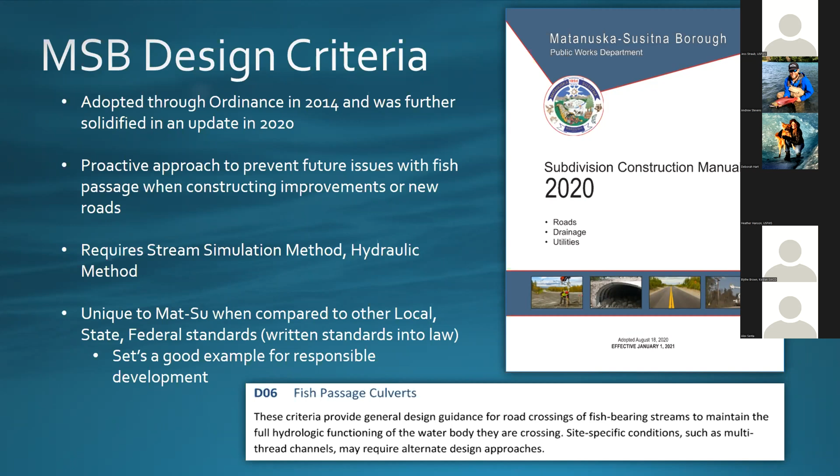Okay, so general problems you see with inadequate fish passage structures. If they're undersized, it creates high velocity. This can cause perched culverts with outlet drops and scour in the downstream section, making it hard for fish, especially juveniles, to move around.

Eventually, or even if they're not undersized, if you just neglect these culverts, they end up failing, corroded, collapsed, and even plugged with sediment, sod, sticks, brush, sometimes beavers. Anytime you have a small culvert, it's easier to plug, and they're harder to maintain. You can't clean out the insides very easily.

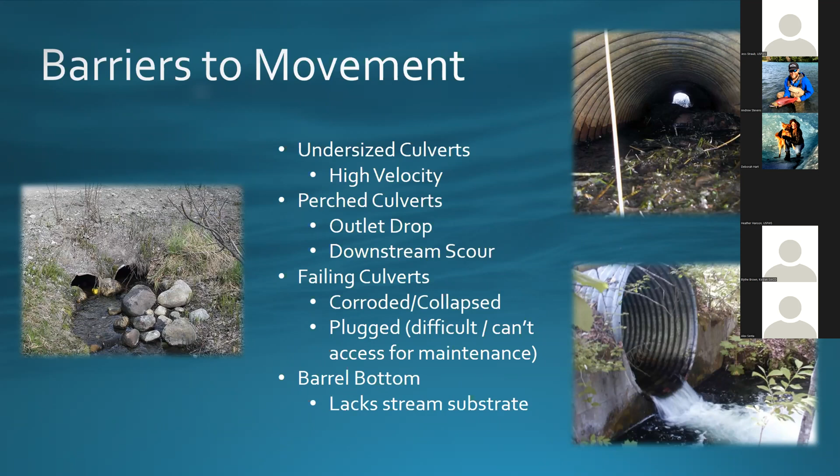I used to have better photos for these two points, but we lost a lot of stuff in a cyber attack a couple years ago. On Cottonwood Creek, I used to have an undersized set of culverts. It's a warm groundwater-fed system, I believe, and it flows all winter long under the ice. If the culvert gets iced up, it basically backs up and comes over the road, creating a big glacier over the road.

In this particular section, it was a curve on the road, so really just a hazardous condition that we would periodically send our crews out to. We have mobile boilers on the back of a dump truck, a big steam boiler, and we would go steam thaw, or bring the excavator out to try and rip through this ice to get water flowing back to the culverts. I've literally seen people tied off to the bank or trees, walking over this big shelf ice with glaciering water everywhere. It's just not a good situation.

So anyway, inadequate fish passage structures cause flooding. They can get frozen up easier. Anytime you're out doing civil work, especially by surprise, it ends up being very costly, and it's not sustainable for the budgets we run.

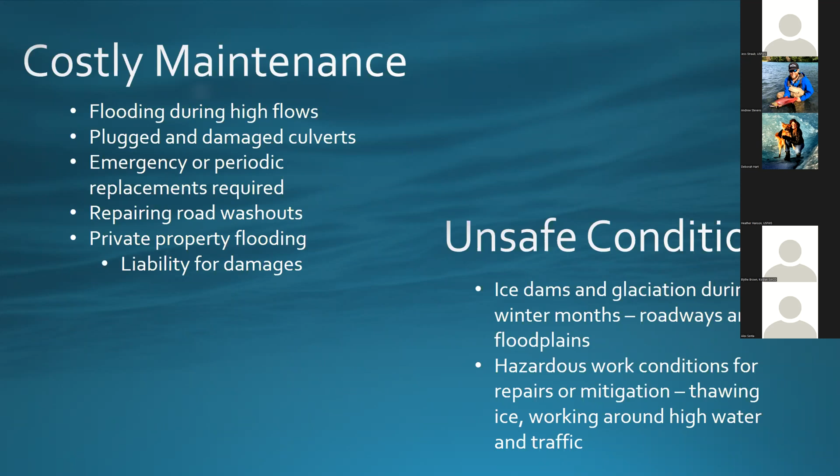Okay, I have a couple projects to highlight here. This particular one is on Cottonwood Creek. It's not the site I mentioned before about the glaciation, but it's just upstream, the next crossing upstream, on one of the residential streets here, Marble Way.

In this particular site, you had a fairly deep entrenched channel through this residential area. Cottonwood Creek is pretty wide. We have one culvert that's about 18 feet wide, and this overflow culvert in the foreground is about 12 feet wide. In the background, you see some white plastic running along the bank—that's your stream diversion.

On this particular project, we actually underestimated what it was going to take to construct that, and we had to cut a change order to do extra work to deal with this diversion. Like I said before, and I'll say it again and some more later, the most important thing on any of these projects is dealing with this diversion water and your groundwater.

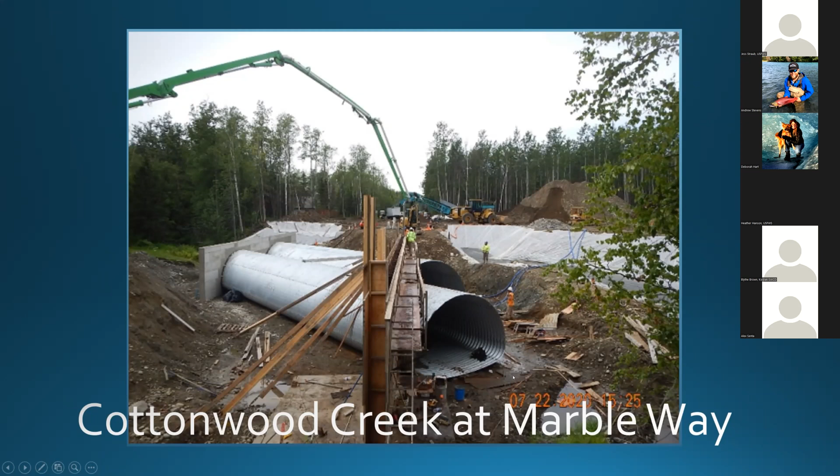This is that same head wall, probably a few days later or a week or two later. This is the downstream side, but similar look. You'll see some more later of the upstream side, but yeah, the finished product of the pipe structure itself, and they're beginning the road work and the bank reconstruction there.

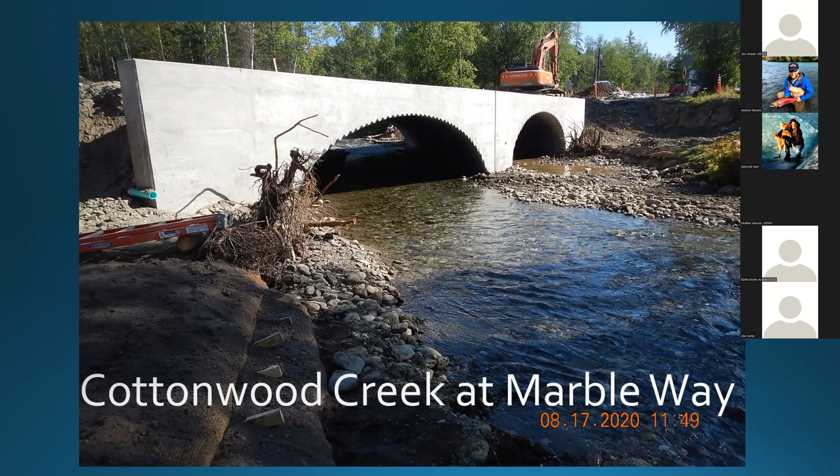This is the same view of the upstream side, basically, that you were looking at before. After it's been placed, the creek is back in the final channel alignment there. The diversion's been backfilled. You can see the soils and everything placed back where the diversion used to be, and the channel back in the culvert.

They're working on some of the foreground here, this is fresh topsoil and some root wads that have been placed next to the retaining wall. And some of the bank work here anyway, that's just starting.

One thing I'll mention in this project, you'll see it in the background where all that equipment is sitting, and a little bit to the right of it all, there's a big cleared area. That's all private land. This site required a lot of excavation, and when you do that, you really have to find a place to put all that material. You're digging out a couple thousand yards of gravel, and you can't really afford to truck it away.

So you need to find somewhere on site to store it. This contractor actually just knocked on someone's door and made a trade agreement to use their property temporarily in exchange for leaving them with a flat pad or whatever they do. We kind of stay out of those deals, but this contractor made that deal with the owner and it worked out. They had a screen set up here to produce some of the road material, stockpiling the waste material, the excess material, and then a nice storage yard for their equipment, culverts, concrete trucks, and things like that.

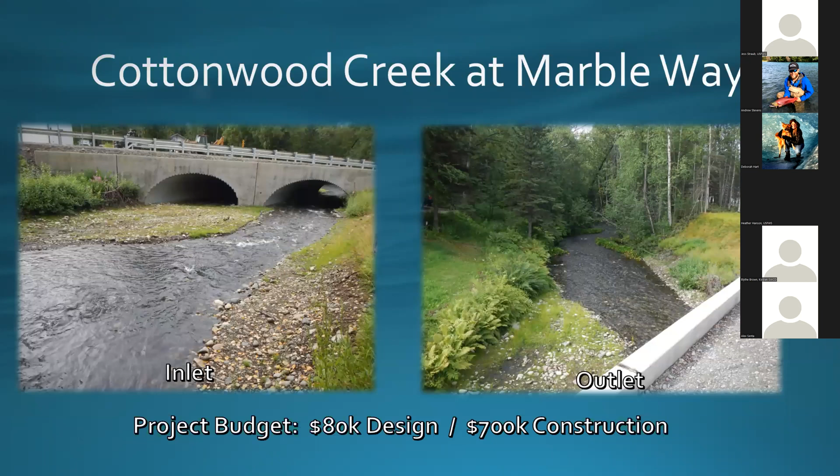Cloudy Lake is up in the Meadow Lakes area. Feeds into Meadow Creek, so the Big Lake system. Phillips Drive is just a neighborhood road down through here. I don't know if this is a man-made lake from back when or what, but this road is basically the lake - this road just kind of holds the lake back.

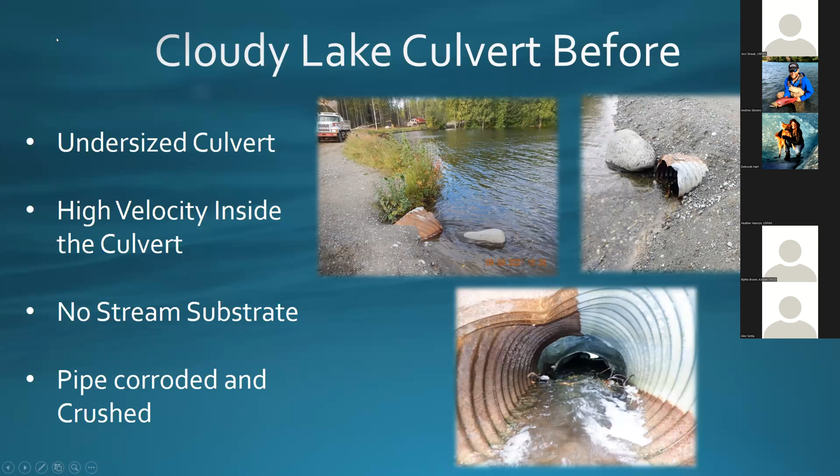Some more of the problems on the downstream section here - just steep grade coming off the pipe, tough to navigate for adults and juveniles, and really, really shallow too. At one point someone tried to put - you can kind of see it in that top photo - a wooden fish ladder, I would call it. But even that was all busted up and mangled, wasn't working.

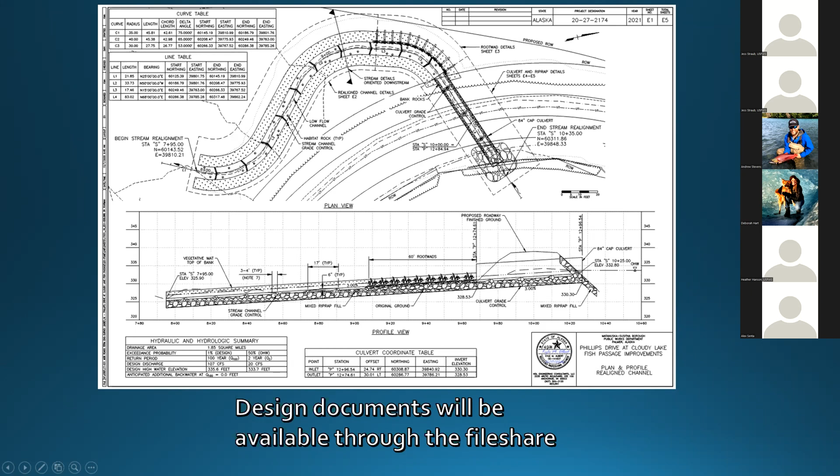Here's what it looks like during construction. We installed that longer channel. It was pretty wet in here, but it was basically excavation and quick stream bed placement through here. So a little bit of wet subgrade was okay as long as it wasn't leaving the site - this was just basically sitting still on our site. So they were able to cut the stream in pretty quick.

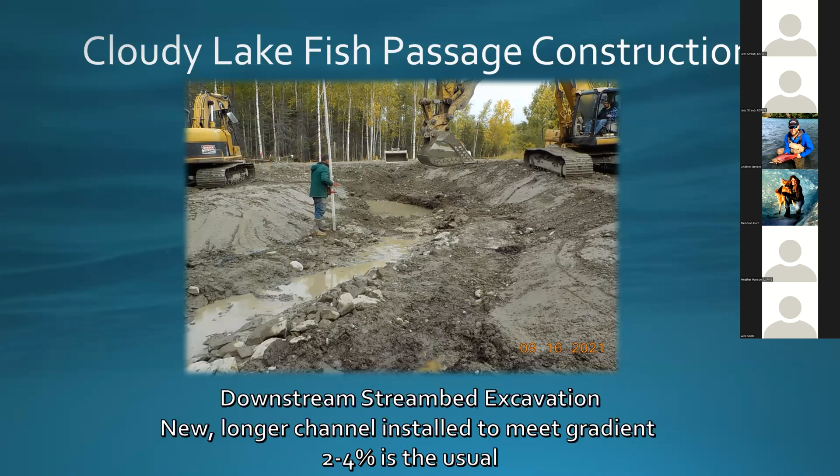Then you got your culvert going in next to the lake here. I put some cut sheets of the sections that we end up constructing.

Okay, so culvert installation - after it's all bid, we get the permits, convince everyone what we're doing is a good idea, stakeholders, get with the public. We're replacing our culvert in the sections down below.

We got to over-excavate a little bit, make sure you have good bedding, your slope is just right. You're setting your culvert in sections. This one was a roll culvert in 20-foot sticks. Usually a fish passage will involve multi-plates that are bolted together. This one didn't need that big of a culvert, and we were able to provide a smaller pipe that just banded together.

Backfill and compaction, key for any civil construction success. They're bringing it up in lifts with the proper moisture control and mechanical compactors.

This is a good one. Another good one - we could implement a road closure to make the site more accessible, open up the whole trench all at once instead of having to have a temporary bypass road installed and managed. That kind of stuff just basically slows the contractor down, makes it more expensive. Again, you can see a nice, clean, dry trench they're working in - definitely dealt with the water good here. Another key.

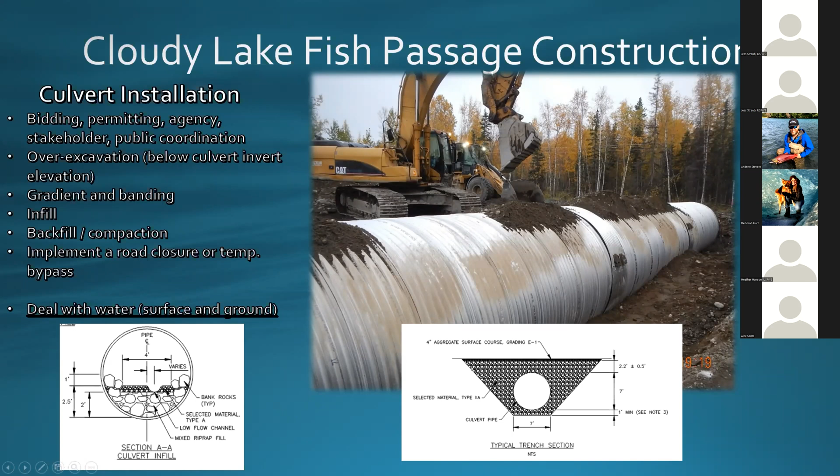All right, so this is the downstream channel as it's being finished with willow cuttings. There are some techniques here - willow cuttings are common on these stream reconstruction projects, but a lot of it has to be buried. You're burying about 3/4 of the cutting in the mud, then it's wrapped with soils and other fabrics, and capped with more veg mat on top of the stream bank, like you see on the left side here.

Another thing - get it in your specs and remind your contractors before they do the work: don't use fertilizer in these areas. These plants don't take well to the nitrogen and fertilizer.

Willows, like I said before, take root and start growing really fast, and in the right conditions can grow several feet in a year. It's just a good bioengineering technique and method. They regenerate themselves, and especially on a narrow creek like this, the whole thing will probably be shaded in by the end of next summer.

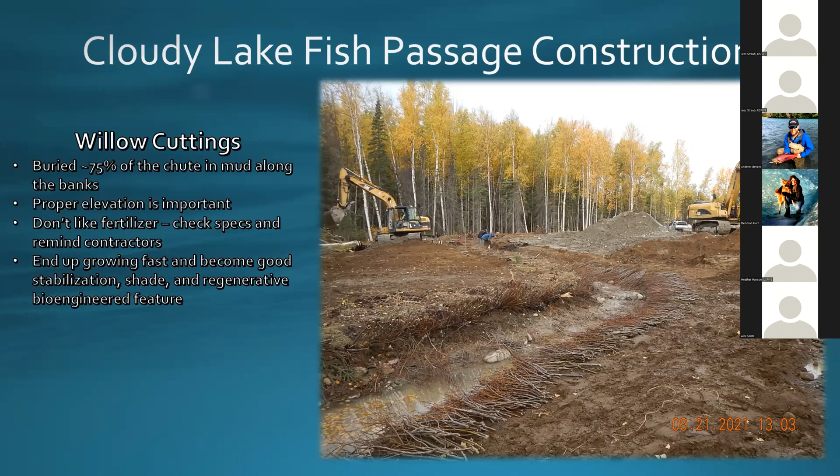Okay, just more info on the realigned channel. Here it is with water flowing through it - this is all toward the end of last year. These were all placed while dormant, and they'll basically stay dormant this winter, then everything should start growing in the spring.

We placed a few root wads near the pipe, willows all the way down the creek, and veg mat on top of all the willows. Within the stream channel itself, we always make sure - as you can see in those lower details - that we cut by design for a low flow channel during dry periods. On the photo in the upper right, you'll see grade control features where we help create eddies and resting places for the fish, and also help retain sediment.

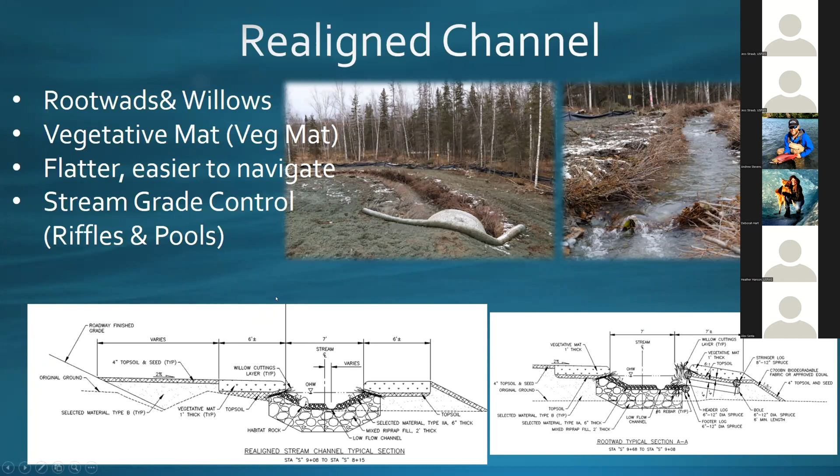Cloudy Lake, after - this was right before freeze-up last fall. The features on this project ended up with a large inlet, a rock and gravel weir against the lake to control lake levels and water flows, low flow channels in the pipe and through the channel.

The grade controls I mentioned - project budget on this one was similar in design cost, a little smaller in construction, but 300,000 is probably about the cheapest fish passage you're going to get right now. This was a relatively small project, but still almost 400,000 total. I wanted to point this out - if anyone wants to come see this project this summer, this is another good one.

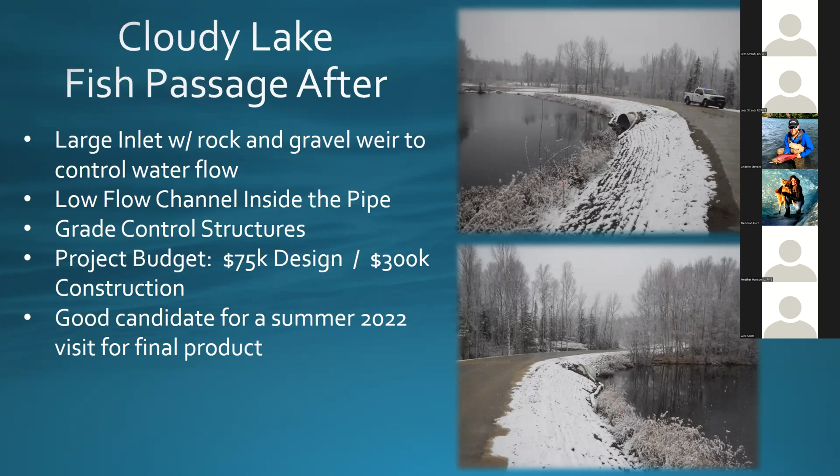Yeah, and there are just some photos of salmon actually using these projects as we're building them, or right when we're finished. Good evidence of success, and it's pretty typical. It's pretty rewarding to see that.

Okay, do I have time for this 5-minute video? And that's the end. Yeah, go ahead with the video.

Okay, here we go - this is Riverdale, it's a third project site. Riverdale Road on Cottonwood Creek. This is the site I was talking about with the glaciation that would come over the road and things, but here we are standing in front of it, and there's a cool time lapse and everything, so enjoy.

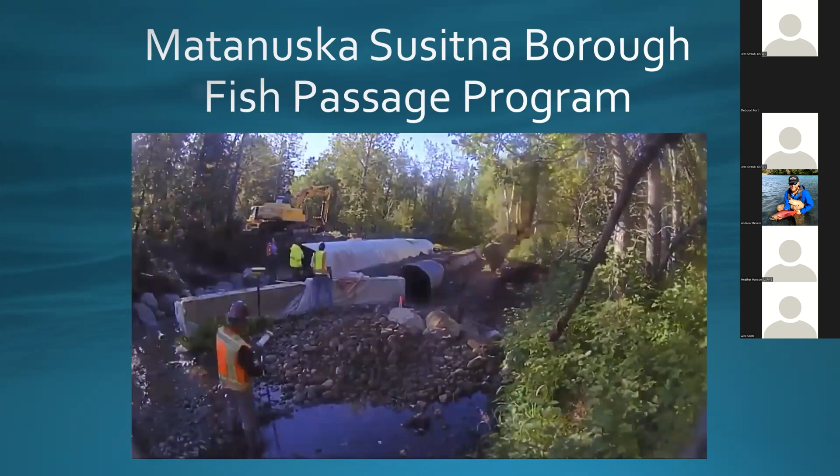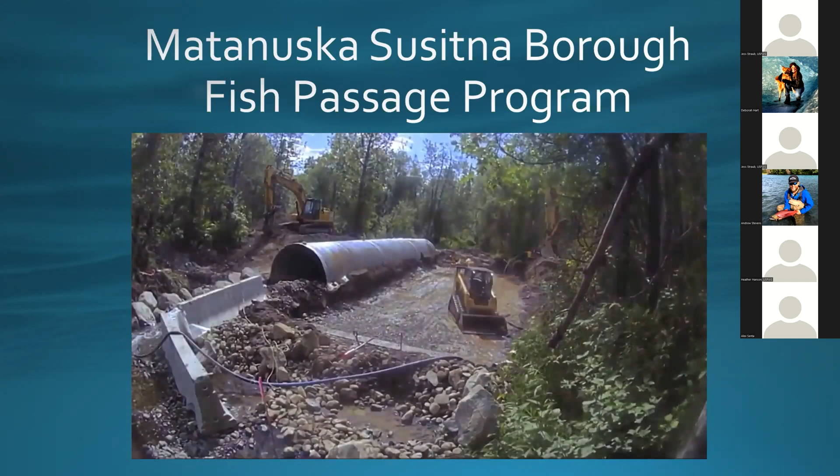So this is a fish passage restoration project, basically. We have a large assessment program - it's statewide, and we assess public thoroughfares, so roads, railroads, trails, for impediments to fish passage. We replaced the culverts - two culverts that were undersized for the size of Cottonwood Creek here - with a much larger culvert and a flood overflow culvert. There will not be high velocities in the culverts like there were in the past, and those high velocities are problematic for juvenile salmon. We also put a natural substrate in the bottom. As we speak, there's probably a dozen reds sitting right here getting ready to go up the creek.

We're glad to be doing these projects and helping out the habitat of the fish and the roadways and flooding issues. I want to say thanks to Fish and Wildlife, Fish and Game, and the borough for making these possible.

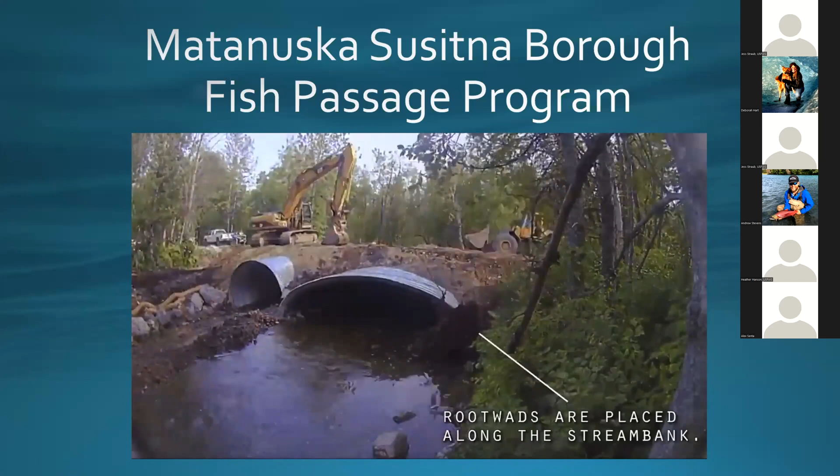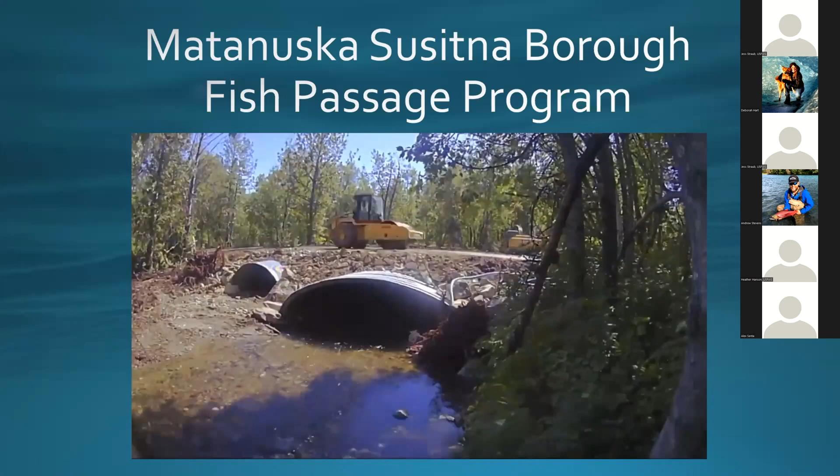Mat-Su Borough has been one of our most consistent and committed partners. They've replaced over, I think, 75 culverts to date and have several more in the works. The scale of the fish passage program in the Mat-Su is pretty unprecedented, and the commitment to really seeing through improving fish passage borough-wide.

That's it. Any questions?